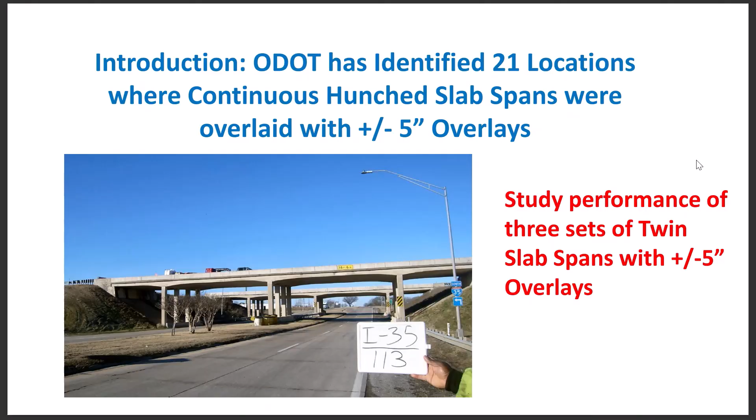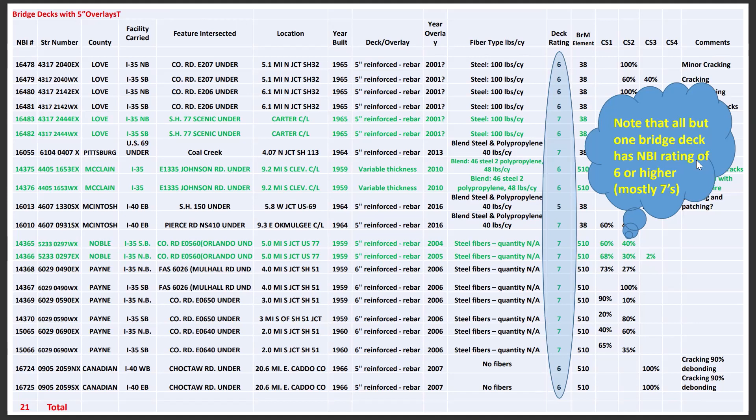So I discovered that we had put these 5-inch overlays on 21 of our Haunched slab spans, and I'm going to talk about 3 sets of twins, all on I-35, northbound, southbound, and they're all pretty much 30, 40, 30, but there's slight variation. You'll notice that the deck rating on every one of them is at least a 6, except one bridge there, it got all the way down to 5. So I'm pretty happy about that.

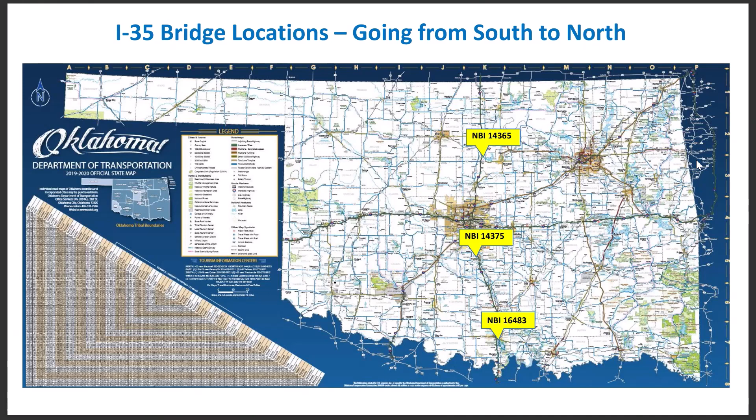This is the locations. We have our south location. It's, if you know Oklahoma, it's down near Ardmore. Then we have one that's 35 miles south of Oklahoma City, which I live in Purcell. That's one I've been driving over for 40 years. And then the North Bridge is near Perry, Oklahoma. So they're all on I-35.

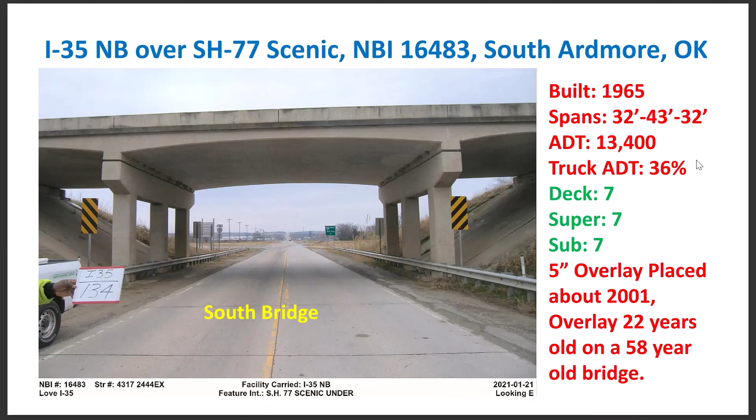So this gets interesting. The plans look pretty similar on all these, and I'm going to kind of make my own estimated deterioration curve. So I went through all the inspection reports, and you go back to about 1965. We weren't doing the NBI just like we are now. It's kind of like the inspection report would say good. Well, is that a 7, 8, or 9? So I kind of put something in there that kind of fit our curve. And the older inspections, they don't have an inspection record every 2 years. I found some gaps in there.

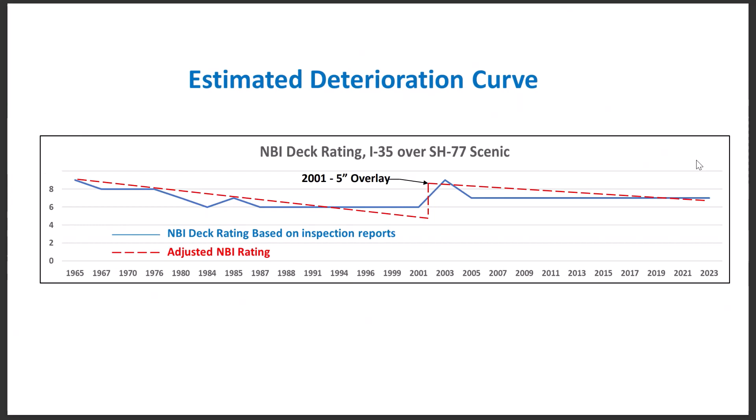Okay, this is one of those bridges that we put 100 pounds of steel fibers, 100 pounds per cubic yard, which is quite a bit. We did milling. We milled half an inch, and sometimes, not necessarily on this one, but we have a roadway pavement that they put asphalt on it, and it's 5 inches above, so it's more expensive to remove the pavement than it is to put a 5-inch overlay, and it happened that these bridges had capacity to take the 5-inch overlay.

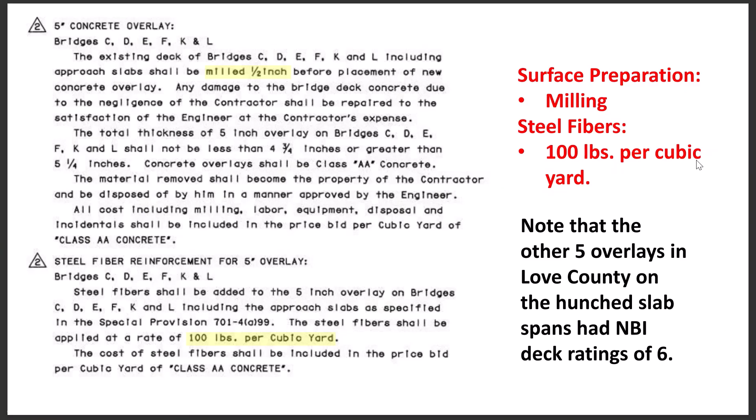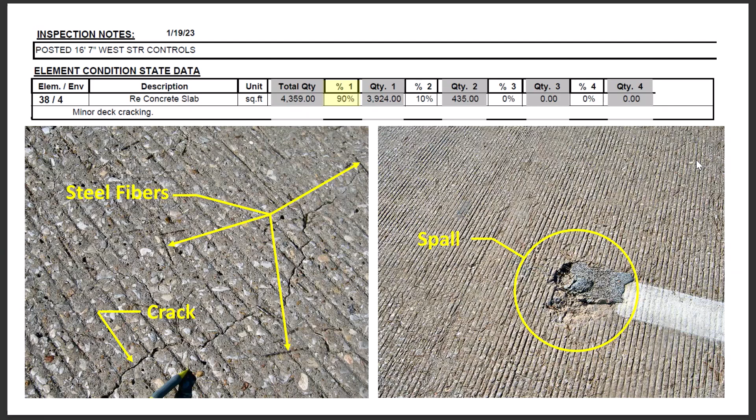So looking at this, you could see the steel fibers at several locations at the surface there. They rust, but they don't connect to each other, so they don't cause a whole lot of problems. We did get a few cracks, and the bridge inspector, he put this, he only rated the deck, which is a slab span, but he put it 90% condition state 1 and 10% condition state 2.

So the next one is the one I've been driving over 40 years. This is the most troublesome bridge.

It was built in '59, so it's 64 years old. The overlay on the inside lane has 17 years of life. On the outside lane and the shoulders, it's more like 13 years. We had a little problem in there, a little hiccup.

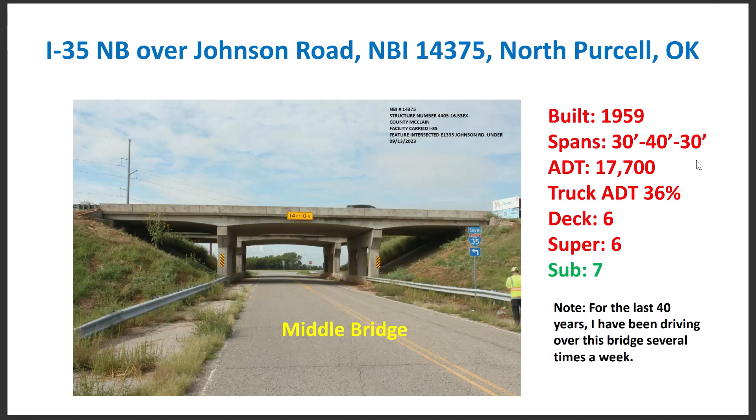We'll explain. The ADT is the highest of all of them, and this is one direction ADT, 17,700, 36% trucks, and there's a quarry just south of here, so the northbound gets some pretty healthy loads sometimes. Plans very similar on every one.

Deterioration curve, it's kind of similar here. We had a little asphalt overlay, seemed to bring it up a little. Then our 5-inch overlay, which this one was sloped, so it's a variable depth, it delaminated on us. So it didn't last real well. We glued it together. We got 4 years out of it, except on the inside, we didn't have a problem.

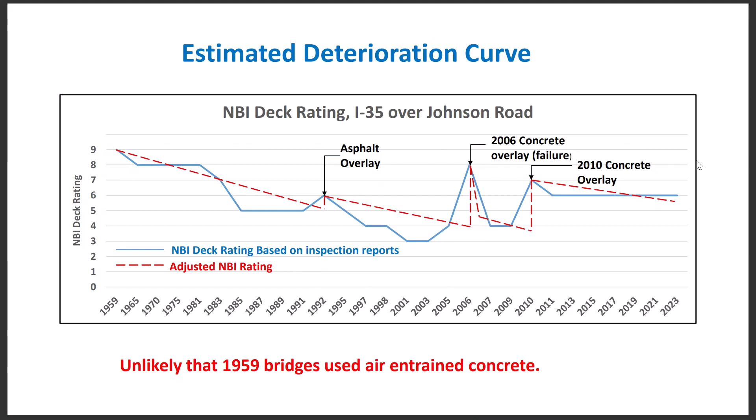So you look at the pictures back in 2006, and it looks like a hopeless case, especially that outside lane. We kept putting epoxies in there, trying to glue it together, trying to extend the life. It was just a losing battle.

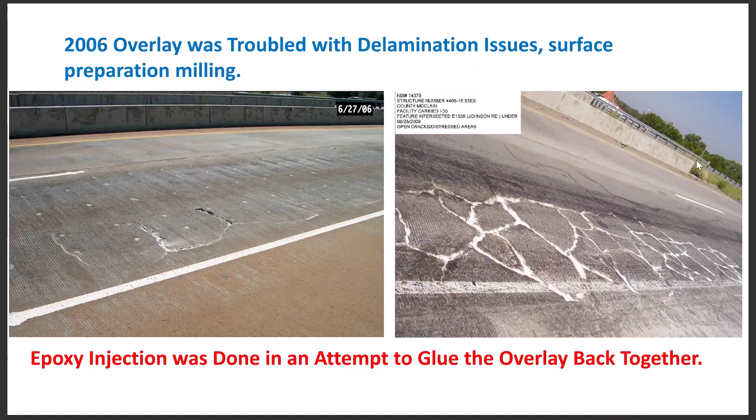So in 2010, we came in and the cross slope was 1/8 of an inch, and it just wasn't draining well. So we did this variable depth overlay. We used fibers that were 46 pounds steel and 2 pounds polypropylene for a total of 48 pounds per cubic yard. The depths varied, it got to be 5 1/4 in the middle.

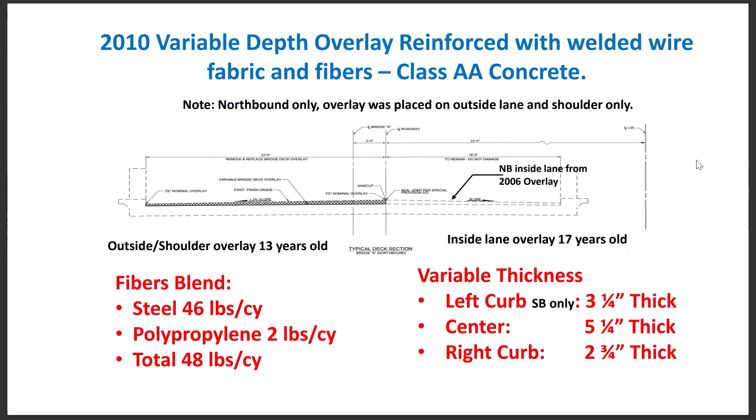We also put a little bit of welded wire fabric in there, but that's all. The other 2 bridges had epoxy rebar plus 100 pounds, but this one just had a little bit of welded wire.

So you look at it today, when I drove over it yesterday, there's in the approach slab, there's kind of a little bit of a patch, a nice bump, which I kind of hate that. And then there's a few other patches. It's holding up fairly well.

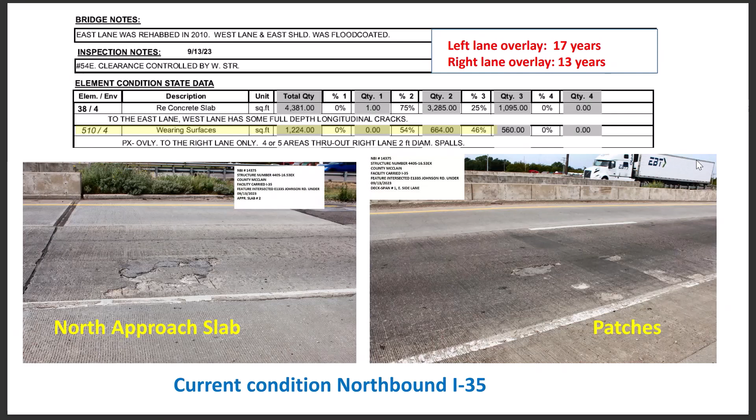You can see there that he coded the wearing surface, element 510, put it in 54% condition state 2 and 46% condition state 3, which is, well, maybe a little optimistic, but it's concerning.

This is the only one I just kind of wanted to show you, the twin bridge. It's a little bit different. We're seeing map cracking on the other side, but this one drives super smooth. I enjoy it. There's a slight bump on the outside lane at the end, but it's really a pretty good ride, and pretty happy with that.

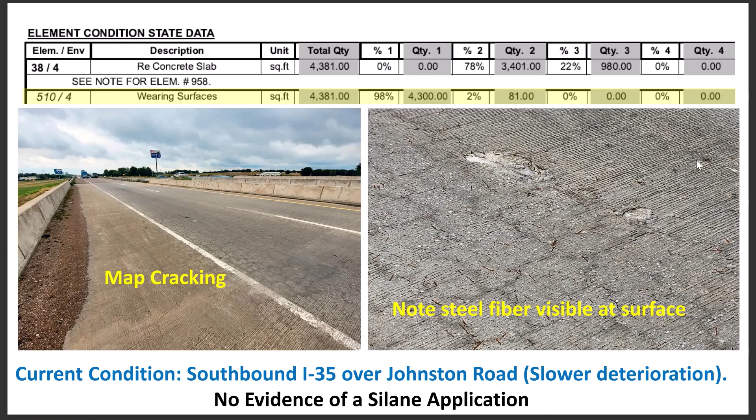They had put it at 98% condition state 1 and 2% condition state 2.

So now on to the North Bridge. Again, this is a 1959 vintage, 64 years old. The ADT is half of what the Purcell Bridge was. The deck is a 7, the super and sub are 6.

You know, some of these, I don't think they used air entrainment, and you look on the underside, the soffit, once in a while you see this efflorescence everywhere a rebar is, and you look at the sides, and they look a little ugly. But the deck, if you're driving on it and you don't look under the bridge, everything looks great.

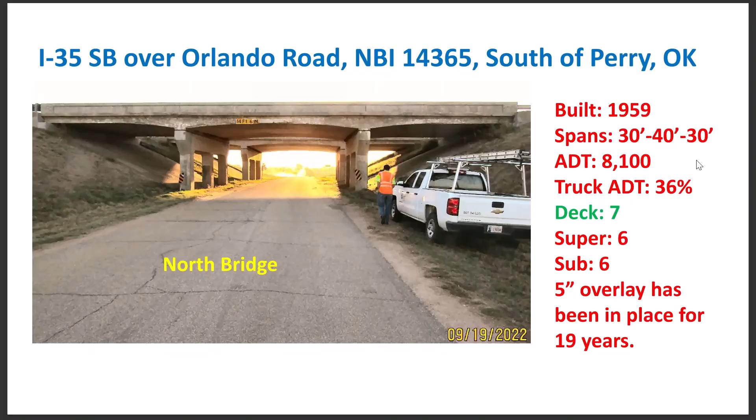The plans look similar. This is just kind of my typical deterioration curve that I came up with. Kind of went through the same process. Asphalt overlay brings it up a little bit, and then it drops.

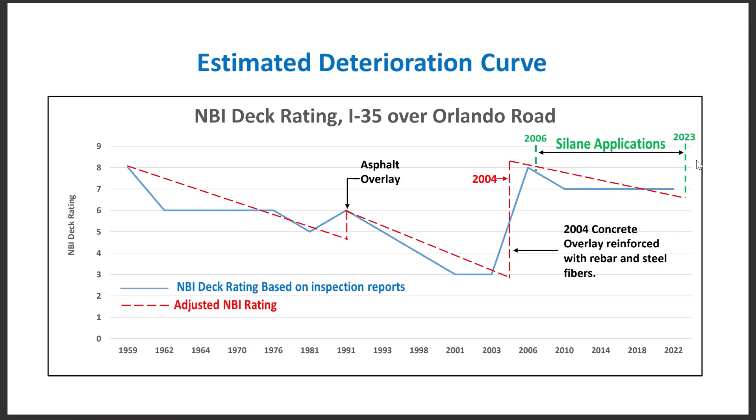In 2004, we have a 19-year-old overlay here on a 64-year-old bridge. It came up, but this one, I did find documentation where we applied a silane in '06, and we're in the process of reapplying that silane. There were 8 bridges in this group in our change order, and all 8 of them have 7 deck ratings, so I think silane played a part in that.

Here's our change order, the plans. It's a case where if we removed the roadway asphalt, it was just more expensive, and we decided it was more economical to put the extra thickness on the bridge, so we did that change order.

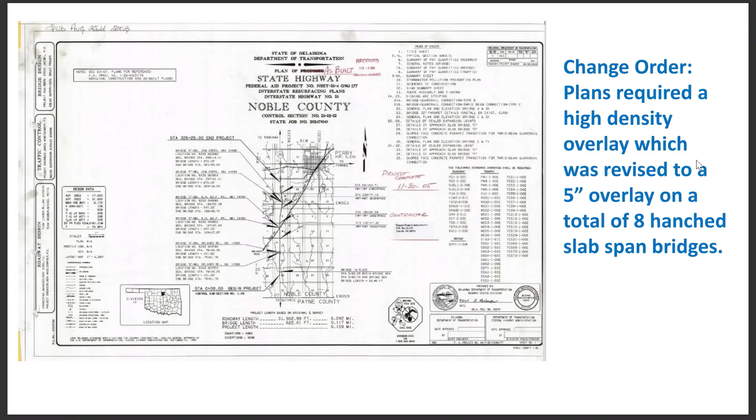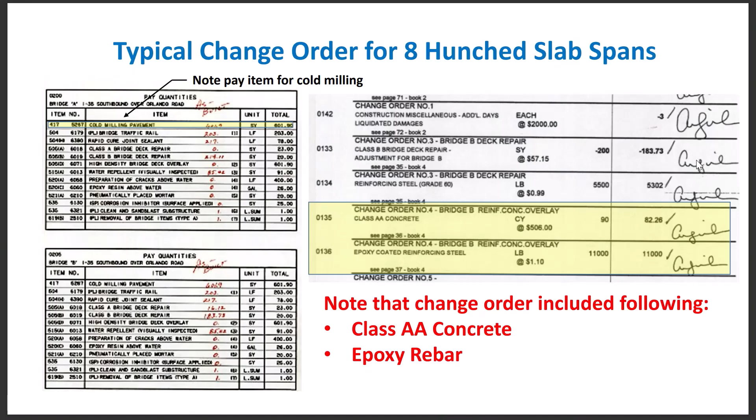The key elements here is we put in the epoxy rebar, and the Class AA concrete would probably have been 3,500 PSI back in that time frame. It's like 4,000 PSI now. I found no evidence of hydrodemolition, but I thought some of these might have had hydro.

The inspector had, I thought, kind of an interesting description of our steel fibers: nails, wires, hairpins. So I said, we put those in there on purpose. It's not an accident.

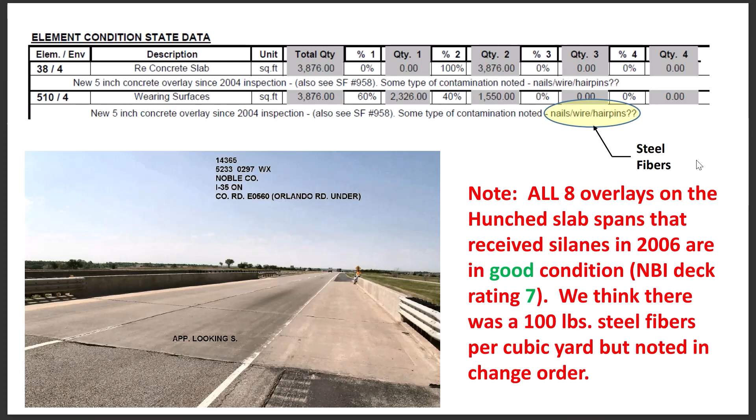We don't know exactly how many pounds we used, but I suspect we used the South Bridge as a guide, and I think we might have put 100 pounds in these too, but we're not sure. We couldn't find the evidence. The inspector said 60% condition state 1, 40% condition state 2, and 8 out of 8 were 7s, in 8 different locations. So a word about silanes.

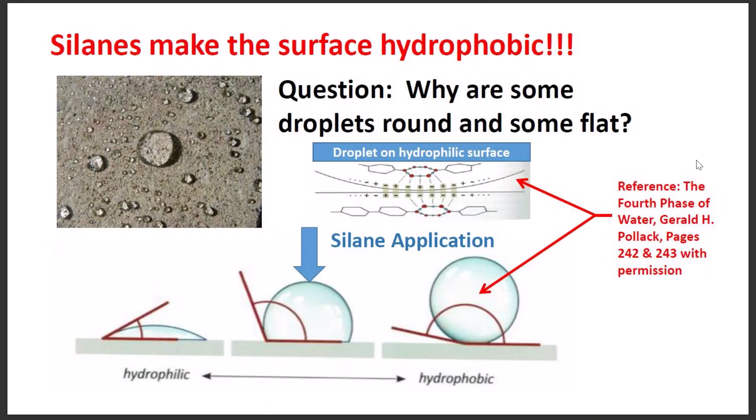They make the deck hydrophobic. The bubble is not totally round, but it's kind of flat a little bit, like the middle bubble there, which makes it bead up, and it keeps those nasty chlorides out of our decks, and it keeps the water out. In Oklahoma, our Dr. Ley, where we do this performance testing, says we're getting 12 years.

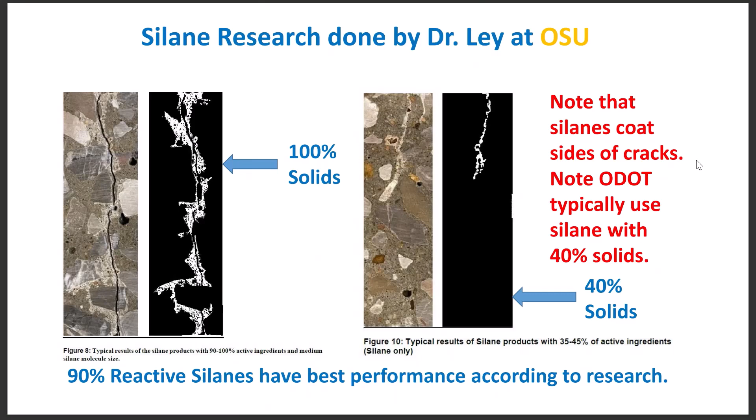Dr. Ley has also said that silanes will seal the sides of cracks, which is very interesting. I noticed that we had always used 40% solids. If we had used 100% solids, we would have got a little better penetration.

Well, you think about that, and that's kind of taking your negative moment. If you take too many of them out, maybe you lose some of your capacity on your bridge there. So this is a concern.

So we told them maybe we'll just do a 2-foot strip. Don't do more than that at once. Or then we started putting false work under them, making that a requirement.

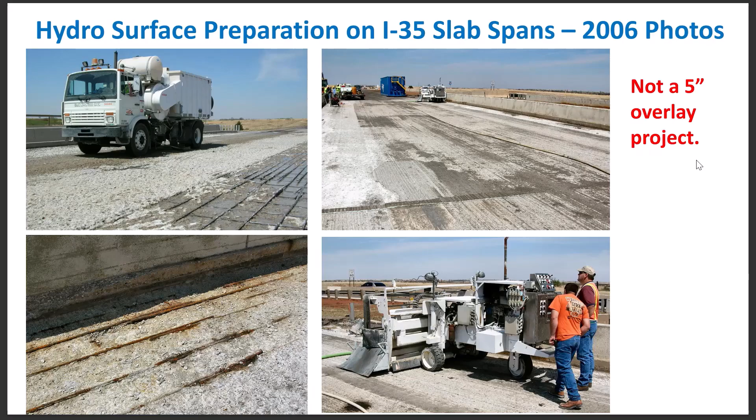I've been wondering if there's some way you could pull stitch in that negative moment area, especially in the curb where you have a little more section loss. But literally I came out to 1 or 2 jobs, and there'd be 4 or 5 negative moment rebar laying on the side there. I don't want to recall where they were though.

So steel fibers probably aren't something you could pump too easily. Dr. Ley's done some research - he's at Oklahoma State University. He says you might consider macro or microfibers, and he's done a lot of research on these macrofibers, and he's pretty fascinated about that, and that's something you could pump.

Also, there's another thing you could do, which is to try to use a little more balanced concrete mix design if you had kind of like 3 bins at your plant, which he calls the tarantula curve.

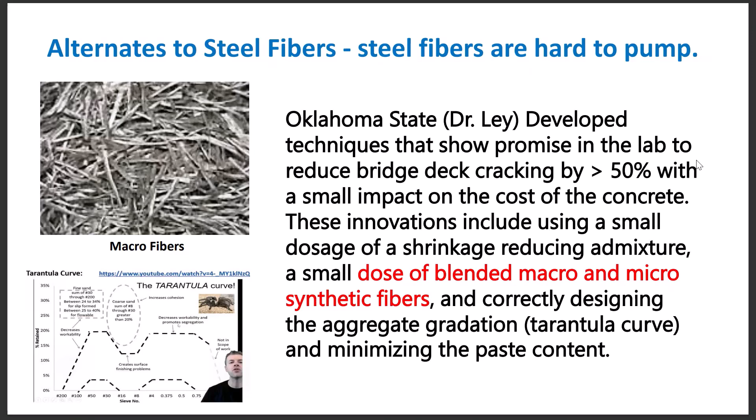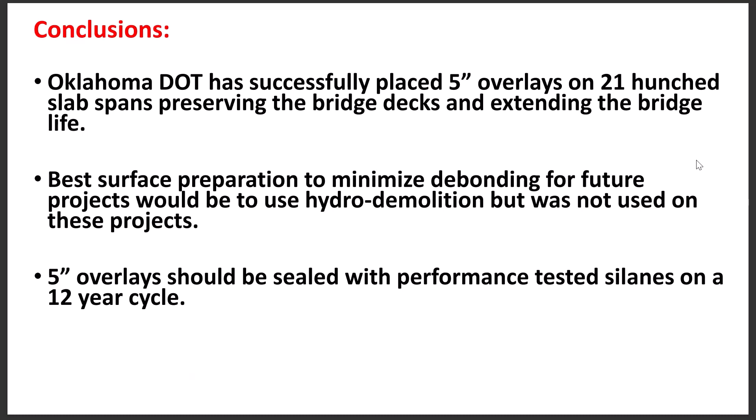And I strongly recommend that you consider sealers. We've had a lot of success with silanes. And like I said, we're getting 12 years out of our silanes.